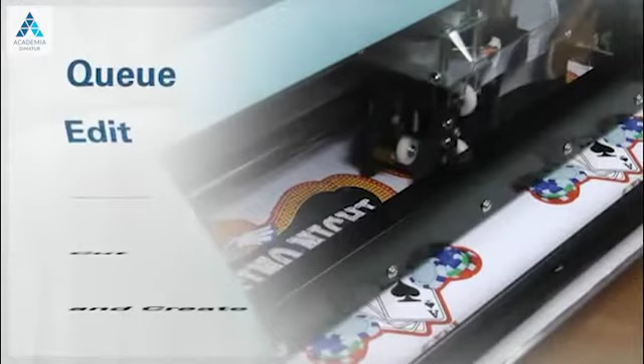We'll be going over everything you'll need to know to create, edit, and print your images, clean and maintain the device, and make sure you feel confident using the BN-20. We'll start with installing the BN-20 out of the box, installing all the software you'll need, and loading the ink and media. After that, we'll go over the utility software, calibrations, adjustments, and maintenance. Finally, you'll be shown how easy it is to queue up your images, edit, print, cut, and create your final product.

Once you've received your BN-20 and opened the box, there's a couple of things included that you should check for and be familiar with: the power cord and the USB cable. Not going to get very far without these.

The software package will include a utility software and drivers, which are needed to run the device, as well as RWorks, an easy-to-use design software. Also included is Roland VersaStudio, a RIP program that will get you the best results from the BN-20.

If your device uses EcoSol Max ink, you'll find a Sol ink cleaning cartridge as well as 4 dummy cartridges. You'll also see an odd-shaped instrument which is a jig used to insert the cartridges correctly. We'll be using these later.

You'll find a wiper scraper, a felt wiper, and blade holder along with a pin and a blade. These are your initial parts to get you started, and they'll need to be replaced occasionally, but more about that later on too. Finally, you'll find cleaning sticks and fluid, as well as the manuals and operation guides for easy reference and troubleshooting.

First things first, find out where you're going to put your BN-20. It's important to choose a location that's easily accessible, uncluttered, and an environment with little extreme temperature and humidity fluctuations. Generally speaking, the BN-20 will need an operational environment that remains between 20 and 32 degrees Celsius and a relative humidity of between 35 and 80%.

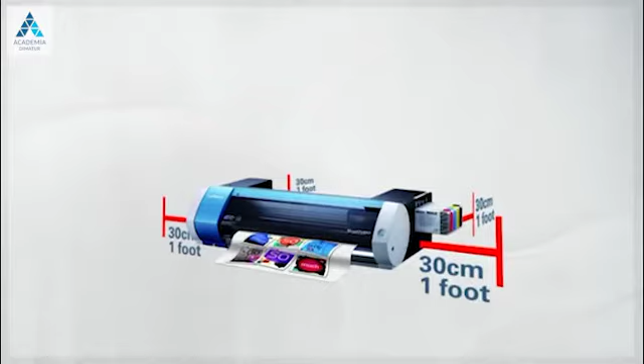Also, the printer will need some space around all sides for ventilation, media loading, unloading, and access, at least a foot from any object on each side. Since the BN-20 is a desktop device, it can fit just about anywhere. Now, before you power up the machine, remove the retainer piece from the platen. This piece is necessary for storage and transportation, but it can cause problems if left in and powered on.

Now that you've got your printer out of the box, you'll need to install the software to run it from your computer. The included software package and utilities are designed for use with Windows XP, Vista, or Windows 7. Let's go over how to install them.

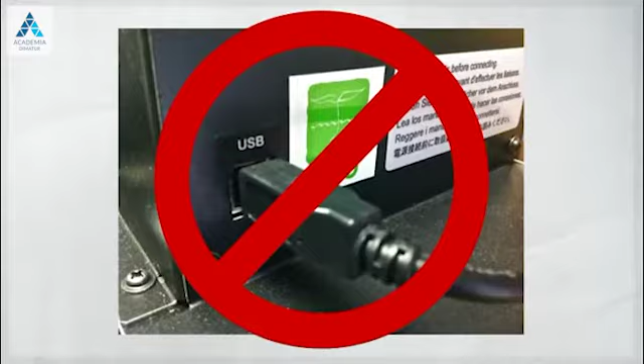Make sure at this point that the BN-20 is not connected to your PC via the USB cable. Insert the CD-ROM and follow the prompts once the installer is started. Click on the Driver and Utility or RWorks button. While the driver and utility are absolutely essential, RWorks only needs to be installed if you're not already using a commercially available design software. Follow all of the on-screen instructions for the drivers, utility, and RWorks.

Then, finally, install VersaStudio from the DVD-ROM included in the software package. Once you're done installing the software, turn the primary and secondary power on and connect the BN-20 to your PC using the USB cable. For Windows 7 or Vista, the printer should be automatically detected. If you're using XP, however, you'll need to follow these steps to finish the installation.

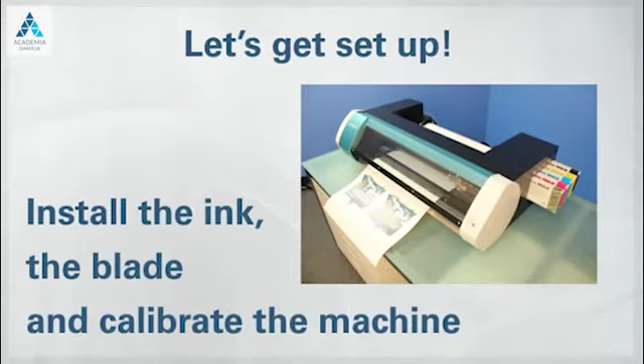Alright, let's get your BN-20 set up and ready to print. You'll need to install the ink, the blade, and calibrate the machine before you can start your projects. But doing this will give you the best results possible.

Before you install the ink cartridges, you'll need to clean the ink slots and ink heads. This will make sure that you don't get clogs the first time out, and remove any debris or dirt from the slots that may have gotten there during shipping.

First, make sure the waste cartridge is in position. Then open up the utility software where the ink filling wizard should pop up automatically. Follow the instructions of the wizard and choose the ink type that you'll be using from the available choices.

Next, it will ask you to insert the dummy cartridges into 4 of the slots and the cleaning cartridge into the remaining slot on the left. Use the included jig to insert the dummy cartridges properly. Click Next and the washing will start automatically, and just follow the prompts to move the cleaning cartridge to each slot so all of the ink slots get washed.

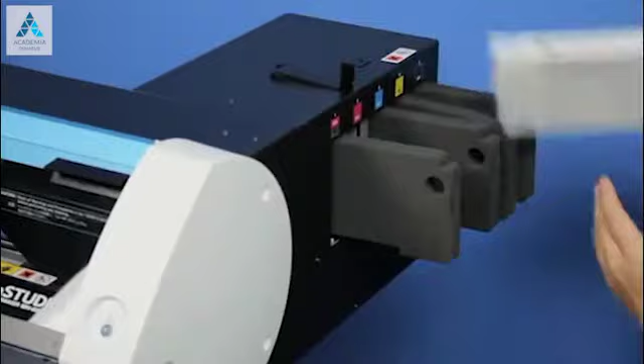After the washing process, the wizard will tell you to insert all of the CMYK-MT cartridges into the appropriate slots, and the ink filling will begin automatically.

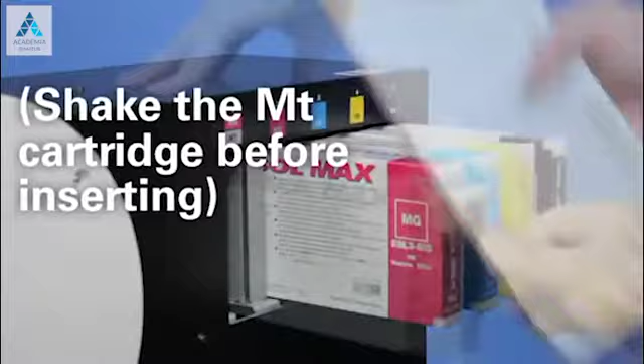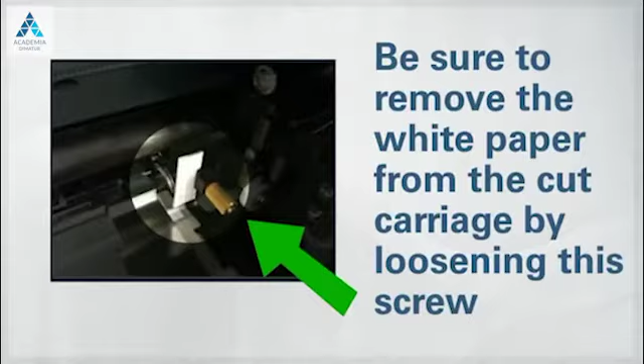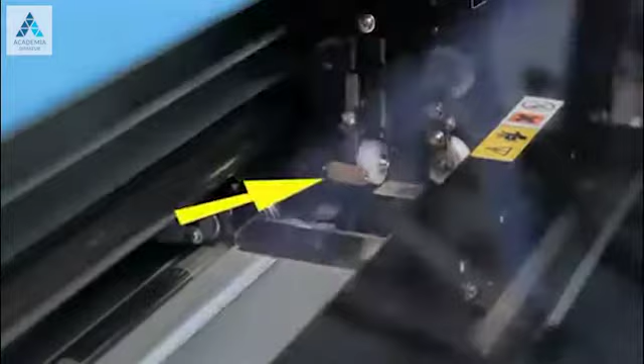The next thing you'll need to do is install the blade into the cutter carriage. Insert the pin into the blade holder, leaving a little bit protruding from the back. Now insert the blade in the opposite end. Next, open the front cover of the machine and loosen this screw. Insert the blade holder and tighten. Give the blade holder a little tug upwards just to make sure that it doesn't come loose.

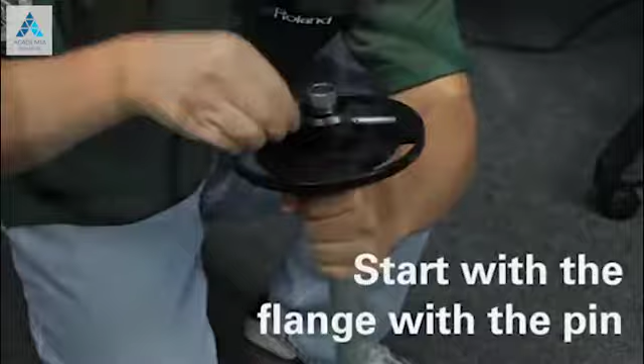Alright, loading media is a simple step, but it's important to get right so it feeds properly into the machine. You're first going to slide one end of the media bar into one of the flanges. Start with the flange that has the pin in it, and once you secure it with the pin in place, place the roll of media onto the bar, making sure it feeds in a clockwise direction when looking at it from above. Finish by pushing the second flange on top to make a snug fit, but not too hard. Be sure to use the side of the flange that fits snugly into the cardboard tube of the media. It'll be the side with the wider diameter.

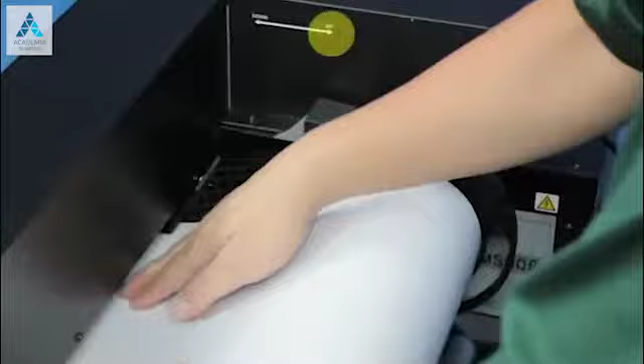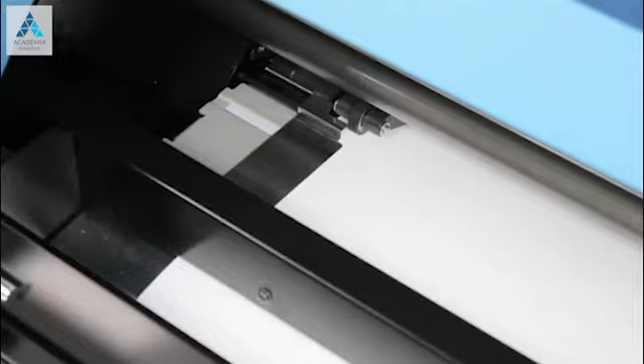Now place the roll into the back of the machine, adjust the media guide by sliding it so it's snug against the media roll, and make sure the feed comes off the top of the roll. Feed the leading edge into the machine with the loading lever in the up position. Make sure that the media feeds underneath the clamps here. Now push the loading lever forward into the down position and you're done. The power light will blink, and once it stops blinking, your media is loaded.

Okay, now before you start going off and printing all of your signs, vinyl, and displays, you should run some test prints and make some adjustments to get the best quality out of your BN-20. Open up the utility software. You should find a convenient tray icon on your toolbar. Under the Adjustments tab, click Adjust All. Click Test Print and a test pattern should be printed.

Follow the on-screen instructions to check for clogged nozzles. If any nozzles are clogged, you may have to clean them by selecting Normal Cleaning and then clicking Go. Otherwise, click Next and you'll be brought to the next step.

The next 2 test prints will check for bidirectional alignment and feed calibration, which are very important for getting the best results. So follow the on-screen instructions to select the values that look the best and click Apply.

The final test prints will test the cutting and print cut functions of the BN-20. These are needed if you're going to be printing any self-adhesive stickers or decals. Otherwise, you can skip them. Follow the instructions on screen and you'll do fine.

Once the test cut is performed, you'll be asked to enter values associated with the quality of the test cut. The cut force is the down force of the blade. Too high, and it'll cut into the back of the paper. Too low, and it won't cut completely through the material. The default setting is 50.

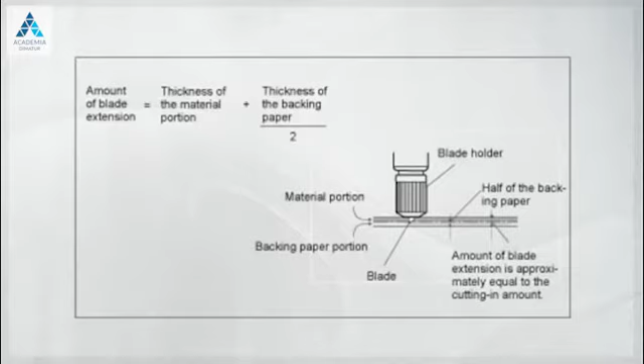After you finish with the print and cut pattern test, click Skip on the screen for the crop cut adjustment. This test is only necessary if you're using overlaminate on your prints. And there you have it. Your BN-20 is now calibrated and ready to begin printing.

For the absolute best results, you should run nozzle check test prints every day before you begin your outputs. The other tests should be performed whenever you change the media type.

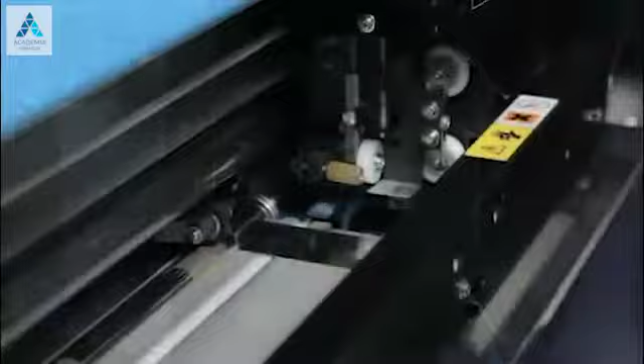Alright, I think this is a good point to talk about some maintenance tasks and schedules while we're on the subject of keeping your BN-20 running smoothly. First off, your machine already has built-in automatic maintenance checks, like making sure the print heads don't dry out, and there's only two things you'll really need to do to make sure these keep working: leave the main power on at all times, and don't leave the front cover open for long periods of time.

Now, for the stuff that you're going to have to do on your own, it's important to keep a regular maintenance schedule for the BN-20, just like any other high-quality print cut device, to make sure it gives you the best quality images possible.

An important task to remember every day is to remove and gently shake the metallic silver ink cartridge. The ingredients have a tendency to separate, and if left, they can harden and cause malfunctions. Also, it's a good idea to gently shake any new ink cartridge before installing it for the first time.

Daily cleaning is also important to remember because the BN-20 is a precision device, and it can be affected by dust and dirt. So a good practice is to clean and wipe down any ink or grime from the media path, pinch rollers, the grit rollers, and the platen. Use a neutral detergent or soap diluted in water and a damp cloth.

Never oil or lubricate any part of this machine. To maintain the print heads, go ahead and run a nozzle check from the utility software as part of your normal everyday startup and test print procedure.

Okay, now there are a couple of periodical cleaning options available right through Roland's utility software. The normal cleaning, found under the Adjustments tab, will clean the print heads and usually fix any dot dropout or nozzle clogging on a day-to-day basis.

However, if the normal cleaning doesn't fix the clog or dropout after a few repetitions, move your way up to medium cleaning. And again, if it fails to fix the test prints, move to powerful cleaning.

Now you might ask, well, why not just start with a powerful cleaning? We've created these steps because the more powerful the cleaning, the more ink is used. So you should always try to use normal cleaning and only resort to medium and powerful if nothing else works.

In rare cases, you might find that not even powerful cleaning will correct the nozzle clogs or dropouts in your test prints. That's when you have to perform a manual head cleaning.

A manual head cleaning consists of using the included cleaning sticks and solutions to clean the print heads by hand. In the Adjustments tab of the utility software, click on Manual Head Cleaning and you'll be guided through the process right on your computer.

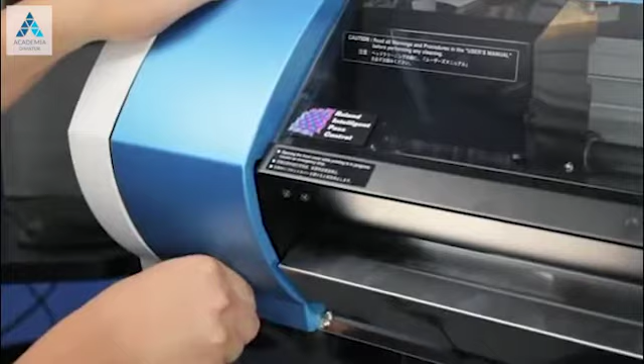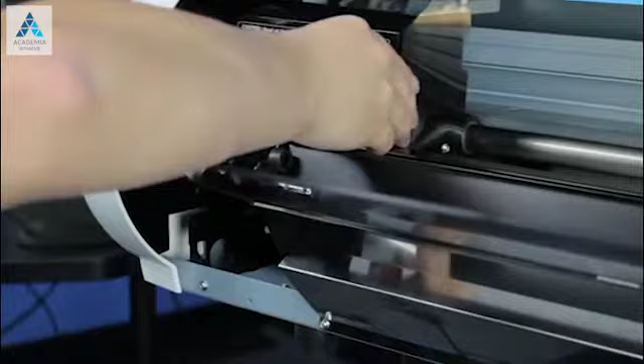First, you'll have to remove the maintenance cover on the left-hand side of the BN-20 by unscrewing the screw along the bottom. Now, move the carriage until it makes contact with the left wall of the print area and soak a cleaning stick in the cleaning fluid.

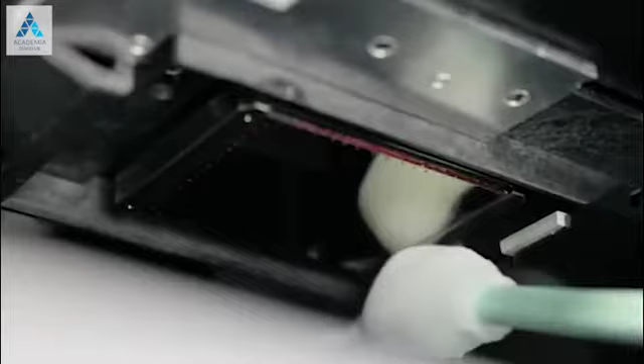Clean the frame around the head surface, avoiding making contact with the nozzle surface itself. It might be a good idea to use a flashlight to make sure you don't touch the surface. Make sure you get all the fibrous dust around the nozzle. Next, clean the frame around the head cap.

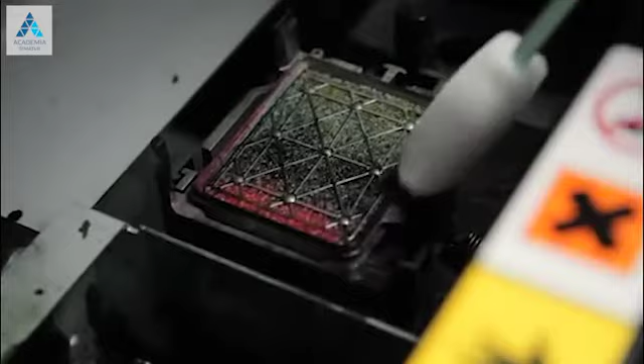And clean the wiper. That's it. Reattach the maintenance cover and close the front cover. The head will move to its normal cap position and a normal cleaning will be performed to finish off the procedure.

Alright, we've touched on the use of the Roland software, but I'd like to get a little more in depth about how you can use the included software to maintain your BN-20 and make some great products.

The utility software will always be running in the background of your workstation once you've installed it. This is important because the software continually monitors your BN-20 to make sure that it's working properly. We've already discussed the Adjustments tab and the test prints and calibrations you can find there, but the Ink and Replace Tools tabs are just as useful and important.

In the Ink tab, you'll find a measurement of all the ink levels in the printer, as well as the level of the waste cartridge. When an ink cartridge is low, it'll show up here, and a message will pop up from the utility software tray alerting you that it needs to be replaced.

Replace the ink cartridge in the appropriate slot after giving the cartridge a gentle shake. Make sure the label is facing up and insert the cartridge until you hear a beep. This tells you that the cartridge is installed correctly. It's important to remember never to mix different types of cartridges and never to pull out a cartridge while printing is being performed.

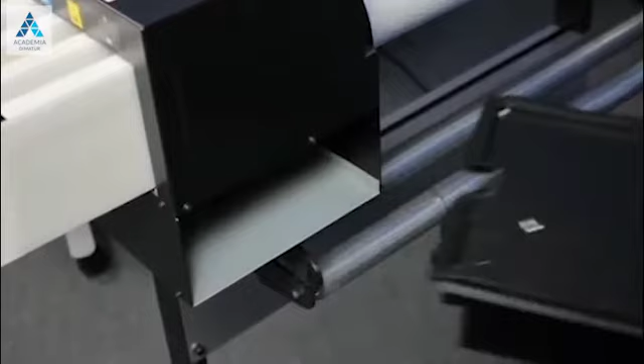When the waste cartridge is full, you'll get another alert from the utility software tray icon telling you so. Only remove the waste cartridge after you receive this message, otherwise fluid and waste ink might still be discharged and it'll get everywhere, and it stains.

Bad. Now, this waste cartridge can't be thrown out with the rest of the trash or poured down the drain. It's flammable and it contains toxic ingredients, so talk to your Roland DG rep about getting replacement waste cartridges and about the proper disposal method.

Okay, this is the place where you'll go in order to replace the consumable parts of the BN-20. Remember those components I mentioned earlier? If you receive an alert from the utility software telling you to replace the wiper or the felt wiper, or if the cutting quality has deteriorated enough for you to determine that you need a new cutter blade, this is where you'll be able to replace it.

The wiper cleans the print heads and nozzles during the cleaning process. When you're alerted that it needs to be replaced, make sure that you have the proper Roland replacement and open the utility software Replace Tools tab. Here, click on Replace Wiper, and you'll be guided through the procedure with on-screen steps and diagrams.

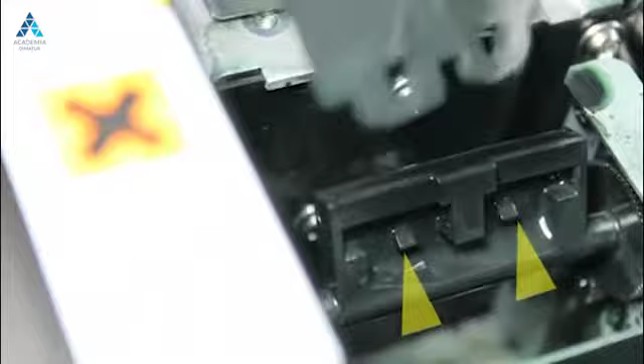After making sure that the print head has stopped moving, open the front cover. Find the wiper and release the two hooks along the bottom that connect it to the print head. Insert a new wiper with the slanted side facing away from you. Now, secure it in place with the hooks and close the cover. The head will return to the cap position and a normal cleaning is performed to finish the procedure, and you're done.

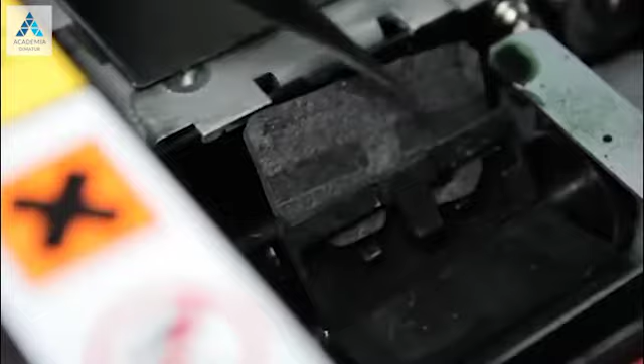Just like with the wiper, an alert message will pop up from the utility tray telling you to replace the felt wiper. Open up the utility software and select Replace Felt Wiper under the Replace Tools tab, and you'll be guided through the process. Much like the rubber wiper, the felt wiper is replaced using the hooks below the print head to secure it into place. It's a simple procedure, but replacing the wiper when you're alerted will make sure that the print heads are clean and your prints are clear.

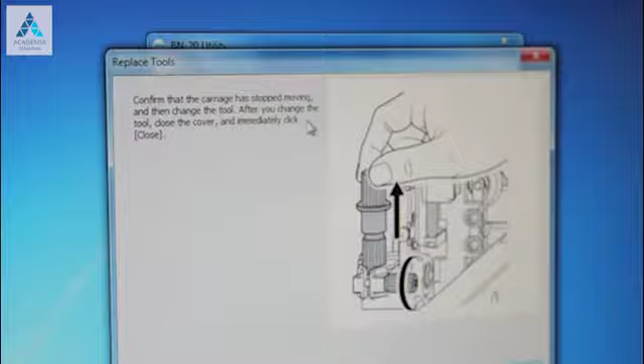When the cutter blade blunts, is chipped, and the cutting quality is diminished, it's a good idea to replace it. Open the utility software, click Replace Blade under the Replace Tools tab. If this screen shows up, just open the front cover and replace the blade following these steps. Remove the blade holder by loosening the brass finger screw. Press the pin on the holder and remove the old blade, replacing it with the new one.

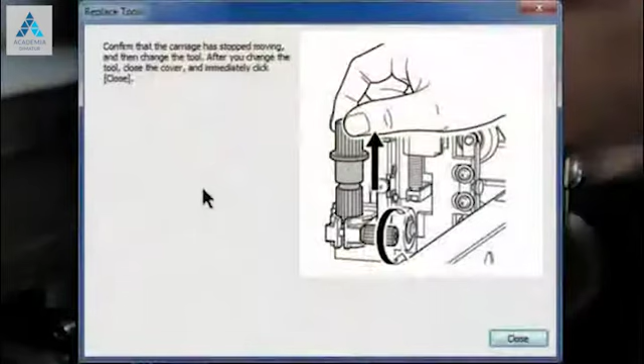Now insert the blade holder and tighten the screw. Give the blade holder a tug upward just to make sure that it doesn't come loose. Close the front cover and click Close in the utility software to return the machine to its ready state. Follow the instructions with a cutting adjustment found under the Adjustments tab.

Okay, we've got your BN-20 set up, all of the adjustments made, and loaded the media and settings. Now let's get your print cutter doing what it was made to do, printing and cutting.

Included with your BN-20 is our latest version of Roland VersaWorks. VersaWorks is a high-performance raster image processor, or RIP software, designed for use with all Roland print and cut devices. This software is optimized to get the best performance out of your BN-20. Therefore, we recommend that you use Roland VersaWorks for all of your outputting, and we'll go over how to use it to create all of your images and graphics.

You'll also get a copy of our VersaWorks Quick Start Guide and Metallic Silver Ink Guide, which will be a useful resource for reference and troubleshooting for all of your printing and cutting.

Once you've installed the software, a good first step is to enable Roland at Net in the Preferences. This will connect your software to Roland to allow you to get the latest updates and information over the Internet. In the VersaWorks menu, choose Edit and click Preferences. Click the Roland at Net tab. Check the box to search for updates automatically, and select how often it will do so.

If you choose Updates Automatically, VersaWorks will check for updates every time you open the program, and you won't be able to use the software during this check, so you can select every day or every week if this is inconvenient. You can also choose to use a proxy server, choose what to download, and when.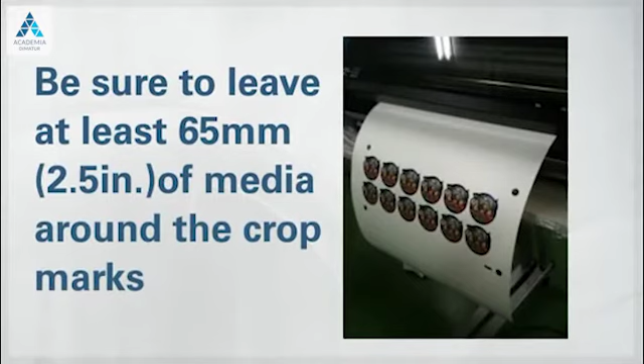The BN-20 will automatically feed a little extra media so you can cut it with enough space to reload it once you've laminated. The BN-20 needs about 65 millimeters or 2.5 inches in order to detect the crop marks when you reload the media, so cut the media with at least this much extra room. Do your lamination. When you reload the media, place the front crop marks aligned with the blade protector on the platen.

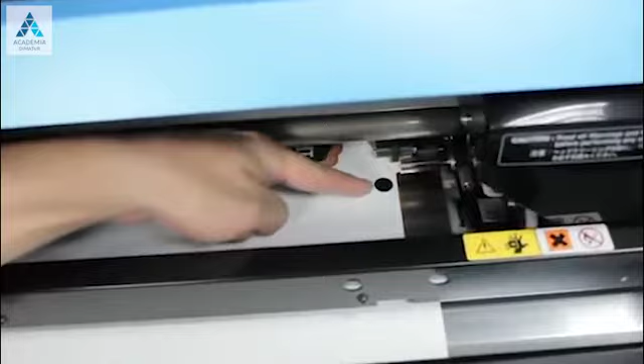Then pull the loading lever to the load position. Then just reprint the same job in the cut-only print mode, and your image will be cut out according to your path.

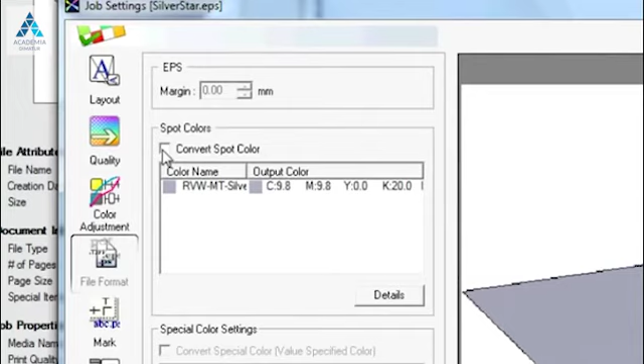CMYK-MT will print faster, but MT-CMYK will print a brighter metallic color that really stands out. Next, and this is very important, go to the File Format tab and check the Convert Spot Colors box. Then click OK and click Rip and Print at the main window, and you're ready to go.

The BN-20 can also print jobs from Adobe Illustrator directly. First, you'll need to adjust the size of your Illustrator graphic to match the size of the media loaded on your BN-20. You can do this in the Document Setup menu.

To find the media width, select Printer from the Control panel. Right-click the BN-20 and select Get Width from Printer. It will then display the maximum width based on the loaded media.

Next, open Adobe Illustrator and create your graphic. Then adjust the document size to match the media width by selecting Document Setup under the File menu. Now remember to set the document color mode to CMYK color.

Next, select a path that you would like to make the cut path, if any, and don't forget to resize the path to 0.001 point. Make sure the print preset is set to Custom, Printer is the BN-20, and the PPD is Default Roland VersaWorks.

You can adjust the printing settings by clicking Setup, then Preferences in the print screen. Here you can adjust the length of the job to fit the length of your graphic, set the media type and the ink mode. This will generally be CMYK.

Now, go to the Printer Adjustments tab and make sure the job type is set to Print and Cut. Then select Line Color, and you can set the cutting path to whatever color you choose on your Illustrator graphic. Click Print, then print again in the setup screen, and your graphic will be printed and cut by the BN-20.